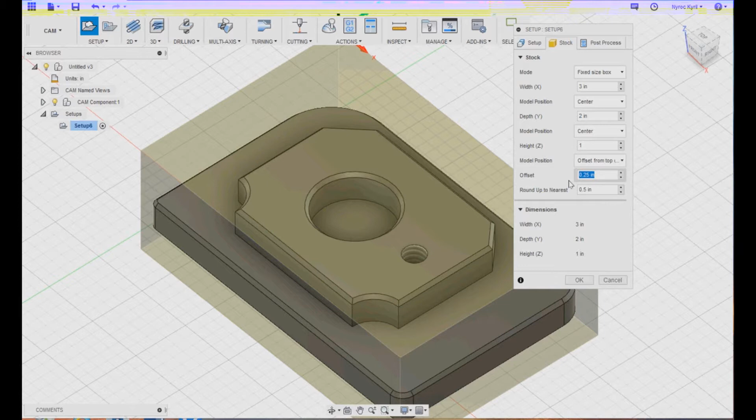And the fixed size is basically telling the machine what size of stock we're going to use. So we've got 1 inch height, 2 inch depth, 3 inch width, and the offset at 0.25. Pause it and go back to take a look if you need to.

Now we're going to go ahead and start defining these tools. We'll select the 2D operation, and we're actually going to go find the 1/2 inch flat end mill here, and that's what we'll be using.

What we need to do here is go to the operation, go to face, then go down and select that 1/2 inch flat end mill. Pause this as you're going to confirm it, and say OK. You should see a little animation, and you can always preview the animation if you want.

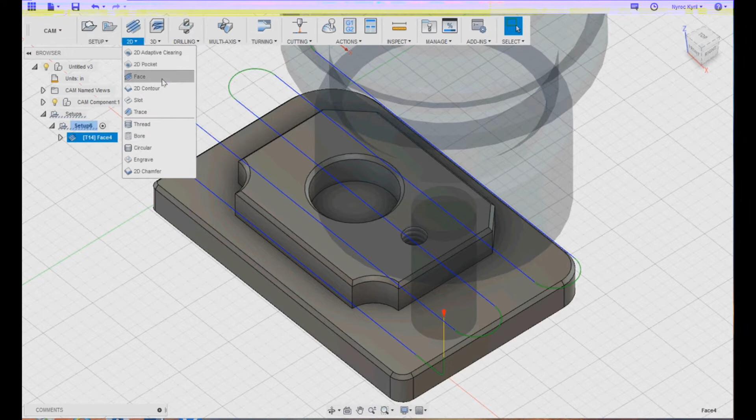Let's go to 2D contour again here, and we're going to select the outside of the part. We're going to do a roughing pass, meaning we're not going to do it all at once—we're just going to take some of the material out, and say OK.

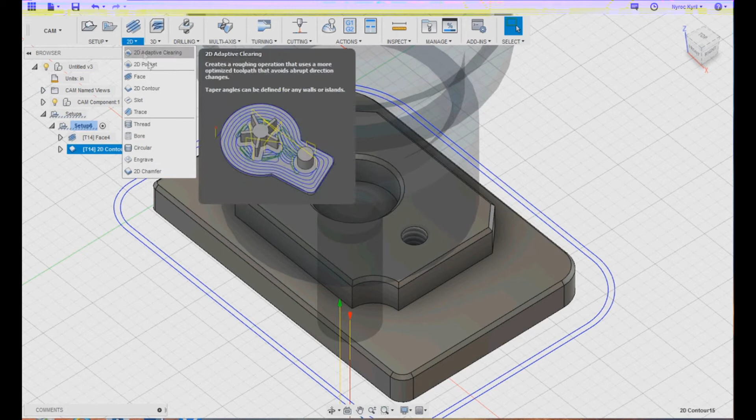Then 2D contour again. We'll keep going through this operation, and this time we'll select the bottom of the top part, and do a roughing pass again. The step over we're going to do here is 0.2, and the number is 3, so you'll see it actually goes around 3 times here.

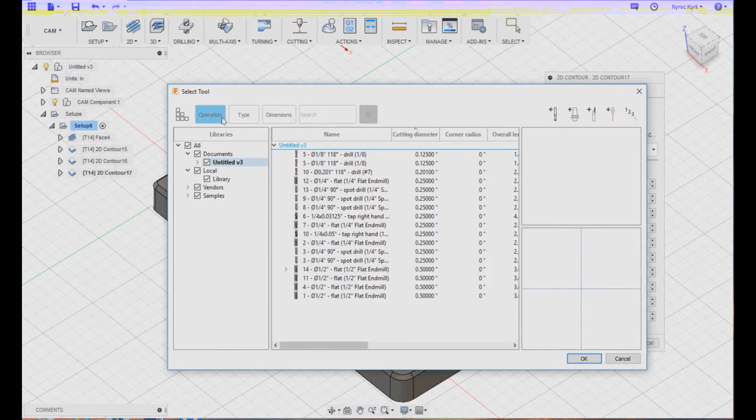Then we'll go another 2D contour and select the operation, then select the same tool, which is going to be your 1/4 inch—this was a 1/4 inch flat end mill.

And this is the 2D contour. Chain it and say OK, and this is actually going to cut out that part. And 2D pocket—what we're going to do is take out this cylinder, so select the bottom of it.

We're good to go here, and you should see the preview of the animation. Select 2D contour again, and we're going to do the outside. We're going to do a chamfer here, which means we're going to take the edge off.

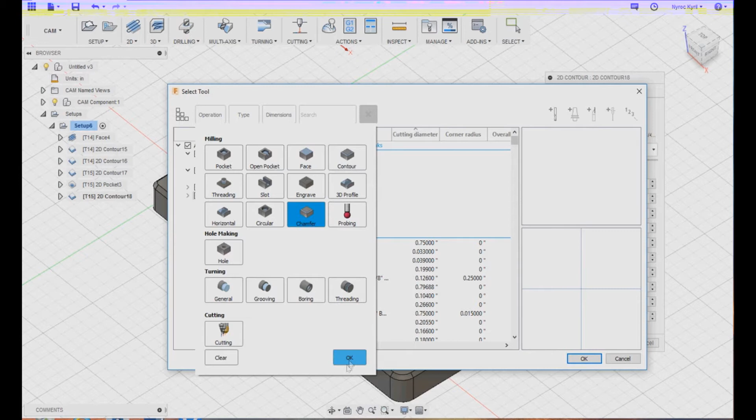We've imported into our library here, so again we'll do the contour. Actually, we should do the chamfer on this one—first time we did the contour, now we'll do the chamfer. Go ahead and select the tool—this is the 1/4 90, number 16.

Really want to check that spindle speed—I think that might be going a little too fast on this. Maybe more like 500, but let's go ahead and do it as we have it. We've got the chamfer, and then we'll say OK.

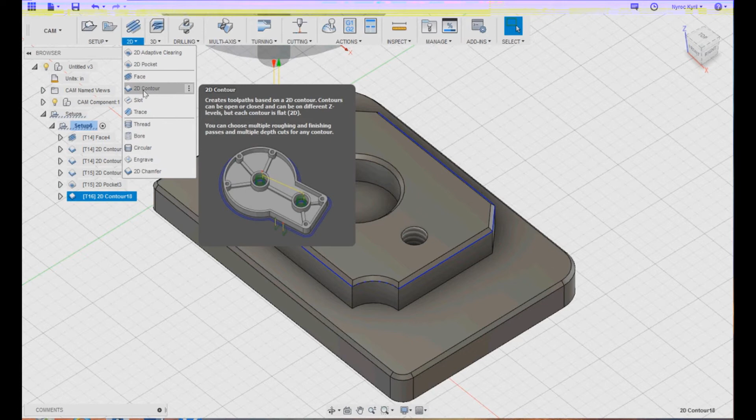Then we'll go ahead and select the 2D contour. We've got the same tool, the quarter, and we'll select the inside of that cylinder. We're going to chamfer that also.

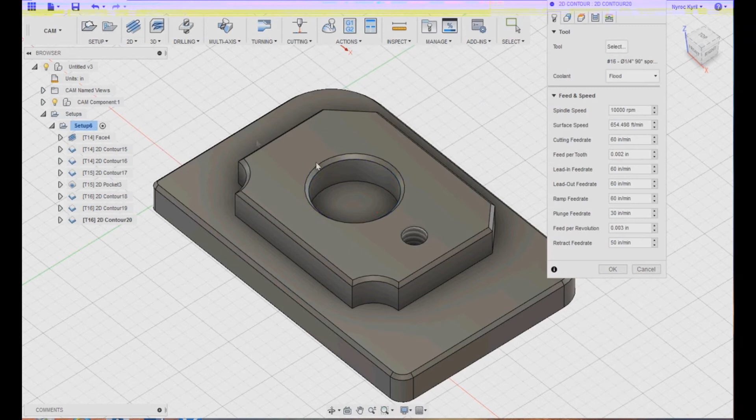Alright, so we're going to do the outside—if you remember, we bored it out. Now we're going to put that chamfer on it.

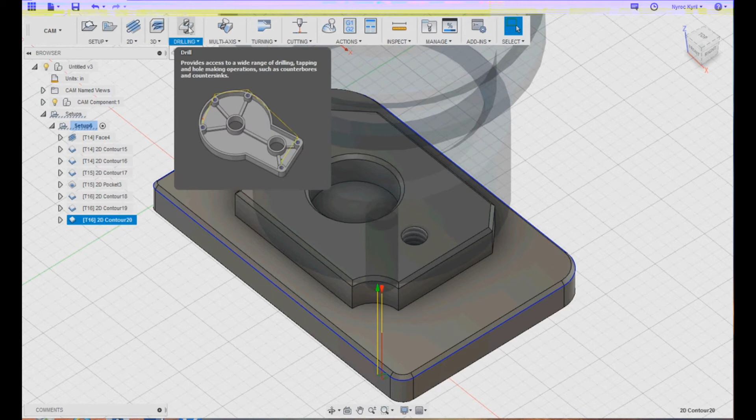Alright, now we're going to go to the drilling operation, and we'll select the inside of the cylinder, and the tool that we're going to use.

First, let's go ahead and select the hole top on the offset. We're not going to do it all at once here, so for the bottom height offset, we'll go ahead and type in -0.05 and push OK.

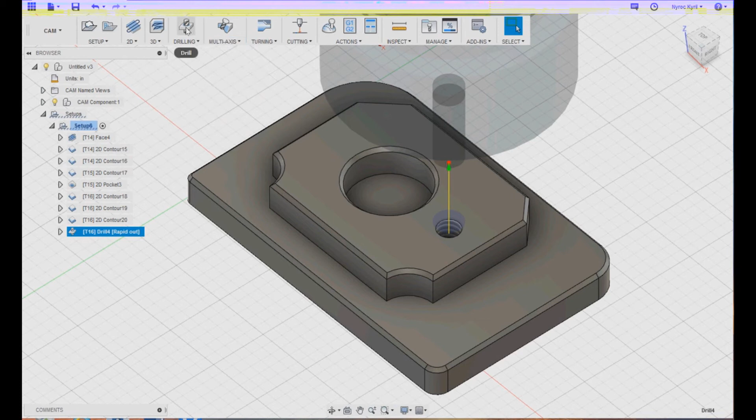Then for drilling here, we'll do another operation. We brought a lot of these in from the library, so the operation we'll do here is hole. Say OK, and if you select cutting diameter, you can change the way it's being shown to you.

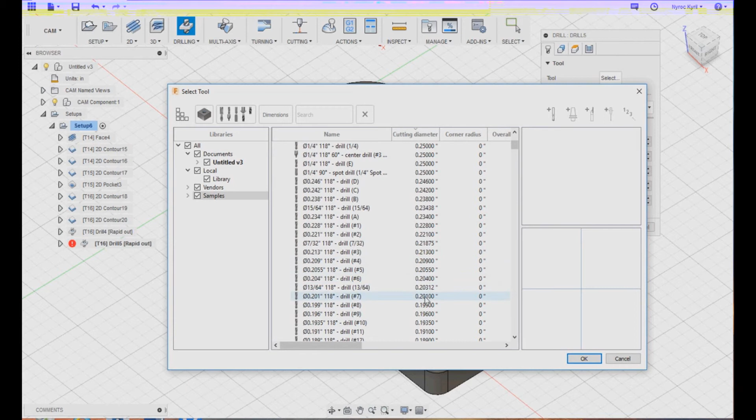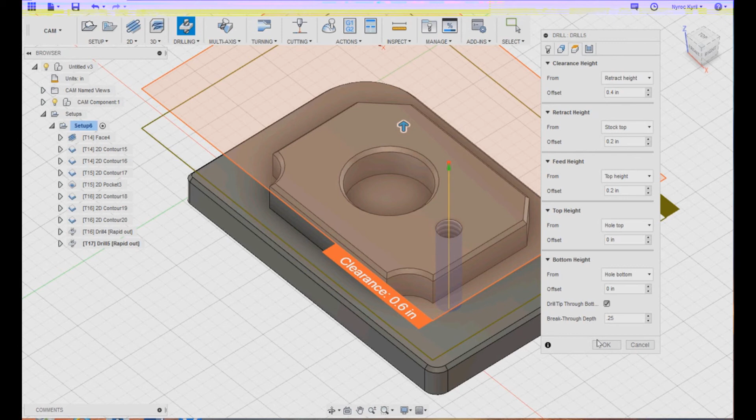Take your time, pause it if you need to—we're going to select drill number 7, then select the center of the cylinder and hole bottom. The breakthrough depth will be 0.25, and say OK. This will go all the way down.

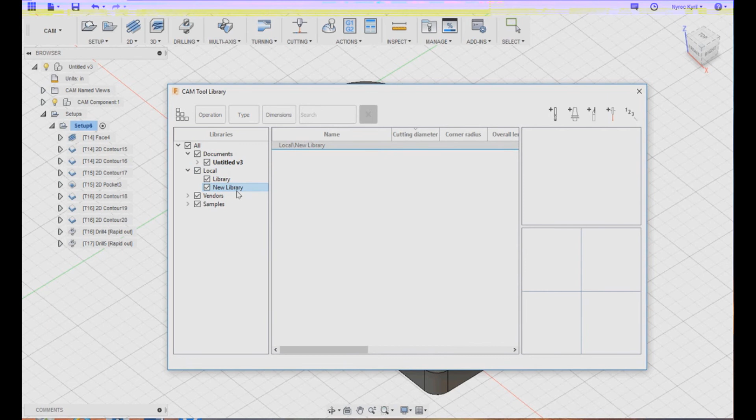So now through the library, we're going to import the library—I have this on our Canvas or wherever you get it, you can download it. It's the tools that we actually have on the Haas machine.

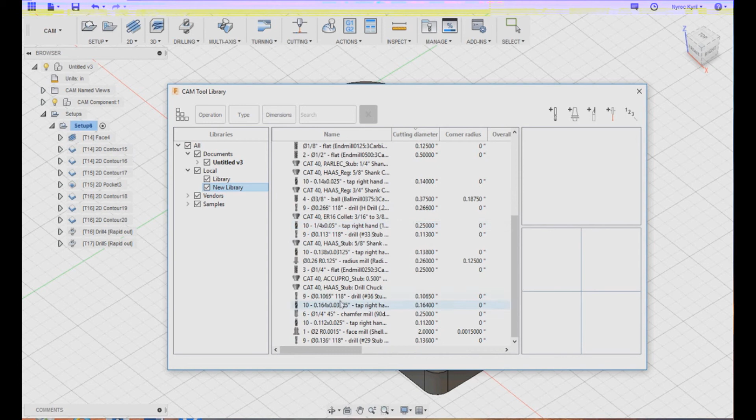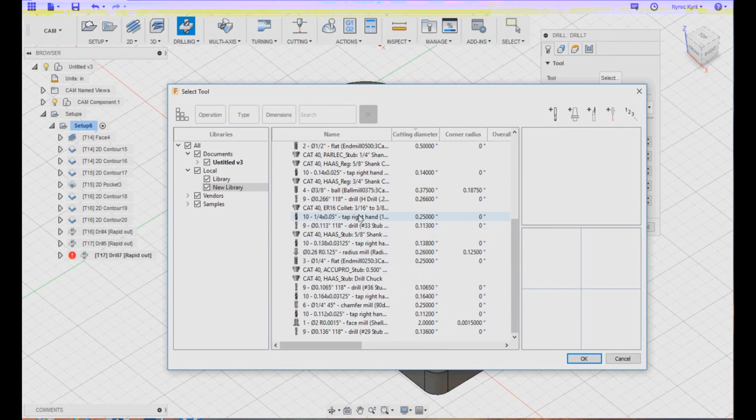We'll go ahead and select, let's see here, number 17 here. So in the new library, number 10, it's the quarter by 0.05, and then it's tapping, so it's going to put a thread in there.

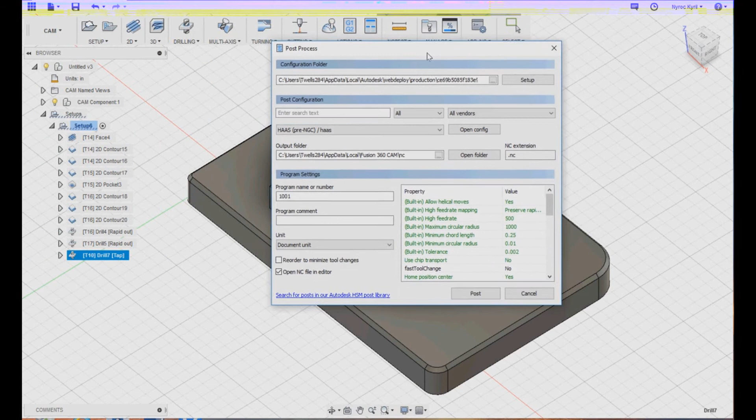And then we can do our post-process here, which means we're going to select the G-code for what the machine is. So we'll go in here, the program number needs to be as it is there. I'm going to select the Haas pre-NGC preload tool. We want to make sure that says no, use G0 yes, and you've completed the tool paths.